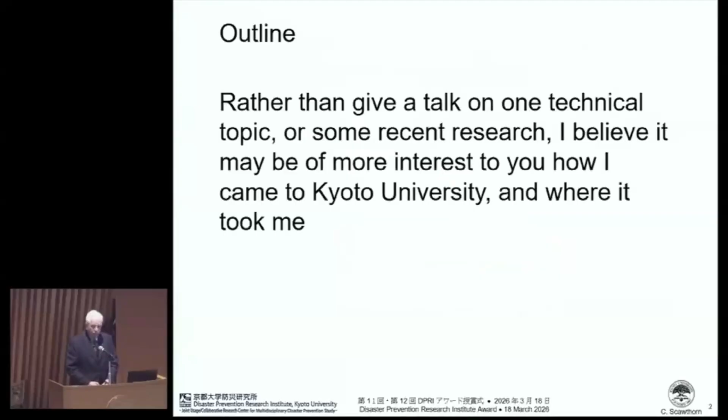The journey began in Brooklyn, New York, where I was born, under the shadow of the Brooklyn Bridge, which is approaching 150 years old and one of the great engineering structures, one of the first large suspension spans in the world.

I went to high school very close to that bridge at Brooklyn Technical High School, which is a special school for studying engineering, and I studied structural engineering there.

I then received a Bachelor of Engineering degree from the Cooper Union in Manhattan, a small school most people don't know about, but which is highly esteemed in some circles.

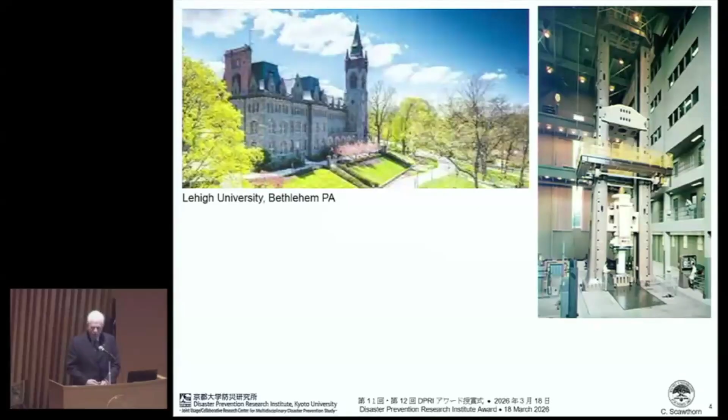And I then received a Master of Science from Lehigh University in Pennsylvania, which prided itself on having the world's largest testing machine at that time, a 5 million pound universal testing machine.

After receiving my master's degree there, I first worked for the electric utility in New York City, Con Edison, which is the equivalent of Tokyo Electric Power Company in Japan, designing electric transmission towers. I actually designed the towers for what was called the PJM, or Pennsylvania, Jersey, Maryland transmission line, which is actually the backbone for electric power in the Northeast United States.

I also worked on various issues having to do with Indian Point Nuclear Power Station, which was owned and operated by Con Edison.

Around that time, I also read a book that influenced me greatly, The Death and Life of Great American Cities, by a lady named Jane Jacobs. Jane Jacobs was not academically an urban planner. As a matter of fact, I'm not even sure she had an academic degree. But she observed life in New York City and what made the city vibrant, alive, healthy and successful, and what detracted from those wonderful, desirable assets. She came to write this book. It's a very powerful book. It influenced many people, and it made me interested in why cities are the way they are.

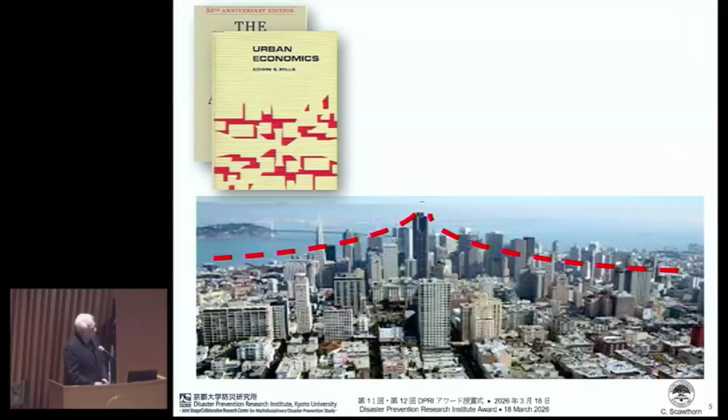So one day I was looking at the San Francisco skyline, thinking about that, and it occurred to me that the city of San Francisco, with its hills and its very soft soils near the water, and its concentration of the central business district with its high-rise buildings right on the softest soils in the city, was actually very poorly designed from an earthquake engineering point of view.

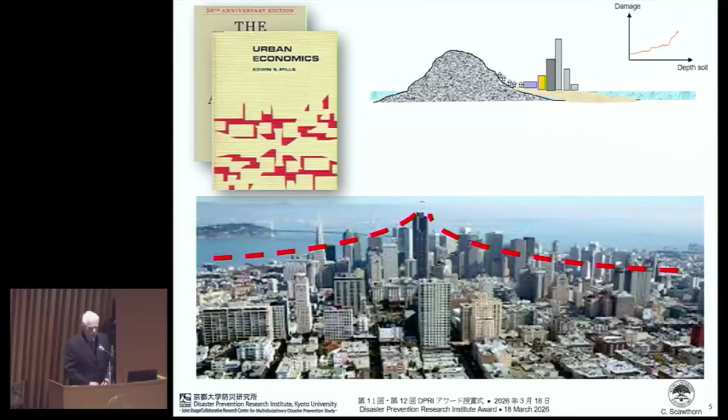As earthquake engineers, as structural engineers, we know that the deeper the soils, typically the stronger the shaking will be in an earthquake, and the greater the damage, everything else being equal. So why had we put the highest concentration of values in the city on the softest soils? In effect, the city was mal-optimized—instead of being optimized, it was exactly the reverse of how it should be when you took earthquake engineering and structural performance into account.

This was a very interesting question for me. I thought, what if we just moved the central business district, the CBD, away from the softest soils? Admittedly it already exists, but if we waved the magic wand and moved it, how far would we have to move it? What would be the delta to reduce the damage significantly? And would that be a valuable thing to do?

Obviously, if we moved the central business district hundreds of miles away, we would eliminate the earthquake risk entirely—we would not be near earthquake faults. But then the cost of transportation, the commuting costs, would be absurdly high, and that was not practical. So what is that delta? I thought, that is a very interesting question—I could do a doctorate on that subject.

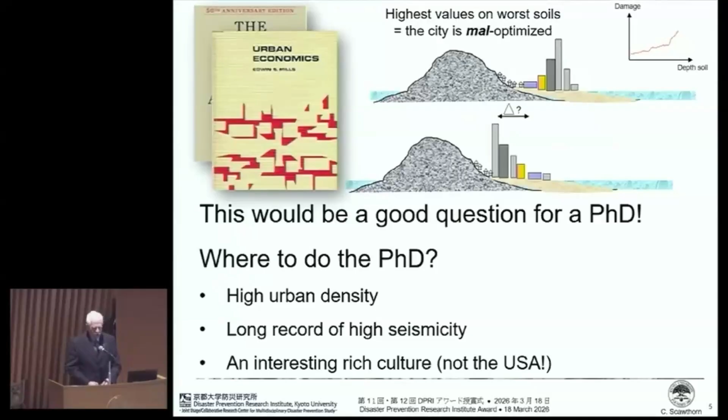But where would I do that PhD? Well, it should be a place with high urban density—that could be places in Europe, the United States, China, Japan, India. It should be a place with a long record of high seismicity, because I was going to look at the influence of earthquakes on urban form. And it should be a place with an interesting, rich culture, if I was going to spend 4 or 5 years studying. I thought, well, that would not be the United States—not because the US doesn't have a culture that's interesting and vibrant, but if I was returning for education, I wanted to learn a foreign language and experience a foreign culture. So when I put all these things together, only one place jumped out at me.

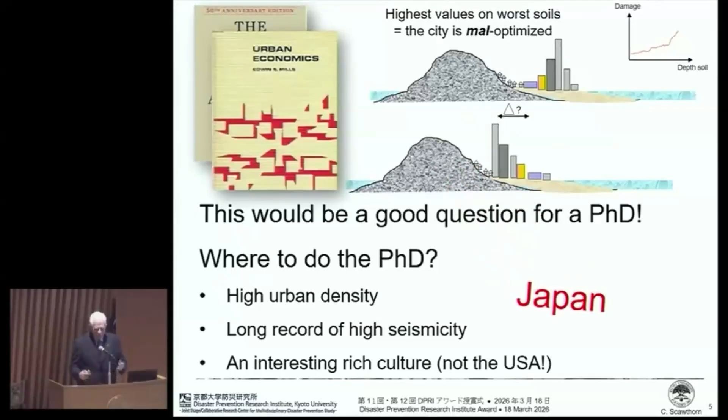And I spent 4 years in Yamada Ken pursuing this question, eventually in 1981 writing a dissertation on urban seismic risk, its mitigation and analysis. I was hoping also to have it be mitigation, analysis, and policy, but after 4 years I realized I was not perhaps a policy person, more a technical analyst. I attempted to provide an integrated study of the seismic risk of an urban region, analyzing the constituent elements and how we might reduce that risk.

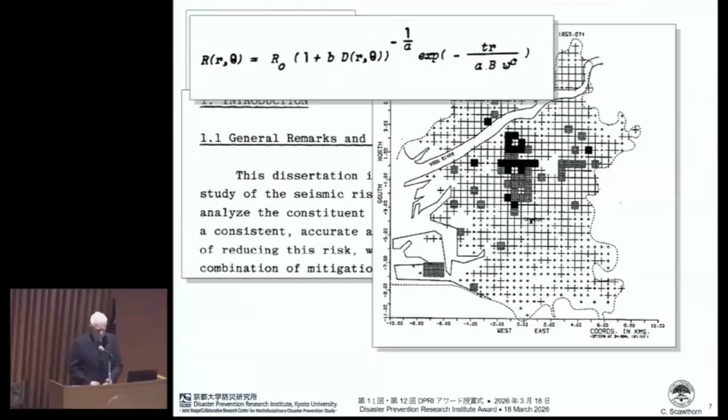I used Osaka as a case study, developed my own form of geographic information system before such things existed, and plotted the damage in this very crude manner at that time—the concentration of values, where they might be, and how it might move. And I took the equations from urban economics and introduced a new term, the damage term, which in effect is a damage function.

So this simple tent-like structure would be the urban form without taking earthquake risk into account. When you factor in earthquake risk, the central business district, the highest buildings, would move over to here, and the form would change in this manner given this damage function. Where we had high damage, the CBD moved away, and where we had little damage, the CBD tended to move towards that. I found that depending upon the subsurface conditions, you only had to shift the CBD a few hundred meters to have enormous savings in capital requirements, since you didn't have to build so strongly for earthquakes, and in the expected future damage—the present value of expected damage that would occur in an earthquake.

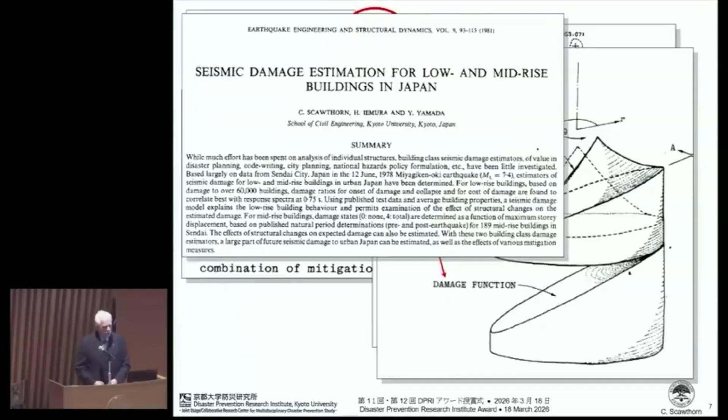I published a number of chapters from my dissertation in journals on the vulnerability of buildings in Japan due to shaking. I looked at 3 agents of damage: shaking, liquefaction, and fire following earthquake—3 of the major ones. I did not look at tsunami, but shaking, liquefaction, and fire following earthquake are certainly major agents of damage in Japan.

I published this theory in an economics journal, and I published the first probabilistic model on fire following earthquake for urban post-earthquake fire hazard. When I returned after receiving my doctorate from Kyoto University, I went back to San Francisco and, with National Science Foundation funding, did a similar study for the city of San Francisco, coming up again with similar results—you only had to move the CBD a few hundred meters to realize really enormous savings.

Now, we're not going to move the CBDs, but this could be a guide for future zoning so that over the decades, the central business district is shifted. Whether that will ever happen, I doubt it, frankly, but it was an interesting theoretical study, and it satisfied my curiosity.

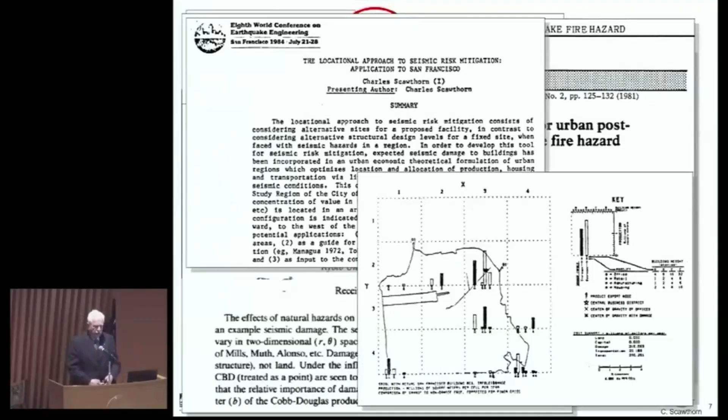But in the course of that, I learned many things. I learned how to model fire following earthquake and shaking. I learned, in general, probabilistic risk methods. And following that, my career has been dictated by that path.

I worked as a consulting engineer for about the next 20 years, then returned to Kyoto University, where I was a professor for 5 years, reaching the mandatory retirement age, then was a visiting professor at these institutions, and have engaged in consulting with one foot in academia doing research and one foot in consulting. It's a symbiotic process where the research feeds the practice of engineering, and the engineering practice feeds the questions to research.

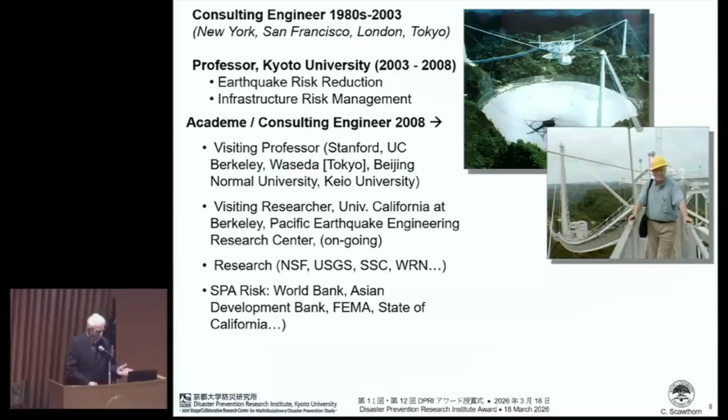Worked on many kinds of structures. This is the Arecibo Radio Observatory that no longer exists but was in Puerto Rico, and in James Bond movies. I did a seismic analysis of that as a structural engineer, and published a number of books and papers on these topics.

I also, at that time, was very interested in trying to reduce death and destruction. One of the greatest sources of death and destruction in the world are low-strength masonry buildings. They exist throughout, as Professor Alcantara Ayala has mentioned, in the Global South. These are unreinforced masonry buildings, taking various forms of adobe, bajareke, or other kinds of construction.

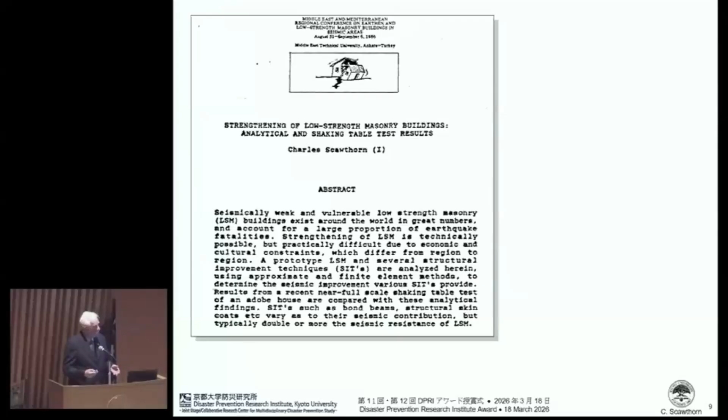Under National Science Foundation funding, I performed the first shaking table test of a full-size adobe building at University of California at Berkeley, and joined a committee and contributed to the development of the International Association of Earthquake Engineering's guidelines for improving the earthquake performance of non-engineered construction.

This is India, Iran, Latin America, much of Asia has construction of this type. These guidelines have been used and improved over the last several decades to reduce the destruction quite a bit. The other members of the committee were all very distinguished: Professor Arya from India, Teddy Boen from Indonesia, and so on. I was very fortunate to work with them.

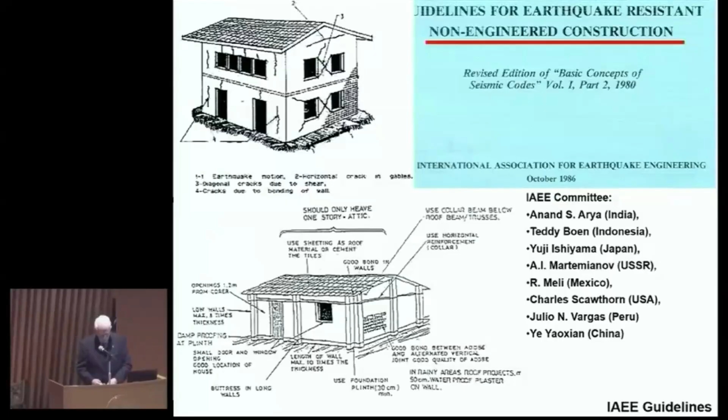But the fundamental thing that I had learned at Kyoto University was this method of probabilistic risk analysis. As we all know, by now this is common knowledge, risk is really the intersection of hazard, vulnerability, and the assets or values at risk.

When you take these things, you need some sort of a risk engine to integrate these factors to measure your risk. But each of these factors, such as hazard, is again the intersection of earth sciences, typically seismology, geology, and other fields. The vulnerability is, again, the intersection of materials science, structural engineering, and the dynamics of structures and so on. There are other fields I'm not mentioning here.

And the values, again, are the intersection of the economics and other values that are associated with assets. So we must combine all of these. Risk analysis is a multidisciplinary integration of all these factors.

But at that time, in the early 1980s, it was really not being very well applied. For example, insurance, which is basically the business of managing risk, in California in 1980 did not use probabilistic methods at all.

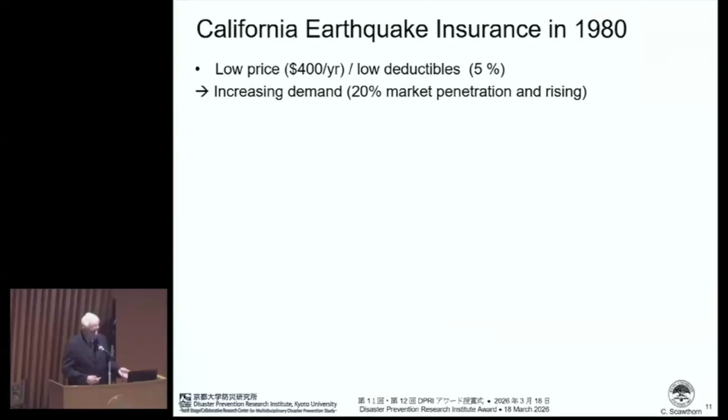Earthquake insurance in California was very cheap, very underpriced. The risk was actually much more expensive than what they were charging for it. More and more people, because of the 1971 San Fernando earthquake and other earthquakes, the demand was rising.

And a very interesting process had occurred, where back in the 1800s and in the 1920s and 30s, the insurance industry actually had much better knowledge of its risk than it did by the 1980s.

Back in the 1800s, they had mapped every building in cities. The Sanborn Company, for example, was one of the leaders in this field, mapping the risk. An underwriter, any insurance underwriter, could look up any building, see exactly how many stories it was, what the occupancy was, whether it contained any vulnerable fire materials or other hazardous materials, whether it was brick or wood or some other construction, where the exits were.

They could see all of this in a book that every underwriter's office had. But by the 1960s, this was regarded as old-fashioned, and all of this technology was eliminated. And underwriting was based simply on, if we haven't had a loss in the past, it must be a low risk, so we'll charge very little for it.

Of course, this omits the fact that some risks are infrequent, such as earthquake or other natural hazards. They only occur once every few decades or even centuries. So this statistical approach failed. But the insurance industry didn't realize this. In fact, they knew almost nothing about the homes and buildings they insured.

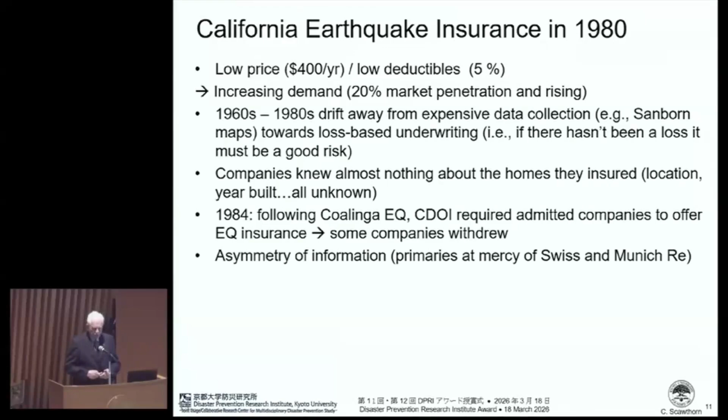Then in 1984, a small to moderate-sized earthquake in California called the Coalinga earthquake further skewed the insurance industry by requiring that all companies offer earthquake insurance in California. So some companies withdrew, and this created a crisis. And there was an asymmetry of information. The primary insurance companies were at the mercy of the reinsurers, such as particularly Swiss Re and Munich Re, who had started to use probabilistic risk analysis and would use the more accurate information that they had to get a better deal when they offered reinsurance to the primary insurance companies, the so-called asymmetry of information. All of this led to what became known as the birth of the modelers, the model companies.

They were born due to the convergence of the probabilistic risk methods, which came out of pioneering work here in Japan by Professor Kawasumi, and in the United States by Professor Alan Cornell, and in Mexico by Professor Luis Esteva and Emilio Rosenblueth. Also, the probabilistic risk methods had recently been started to apply to the nuclear power industry. So in a way, it was a trickle down from the nuclear power industry in some ways. It also occurred because by the early 1980s...

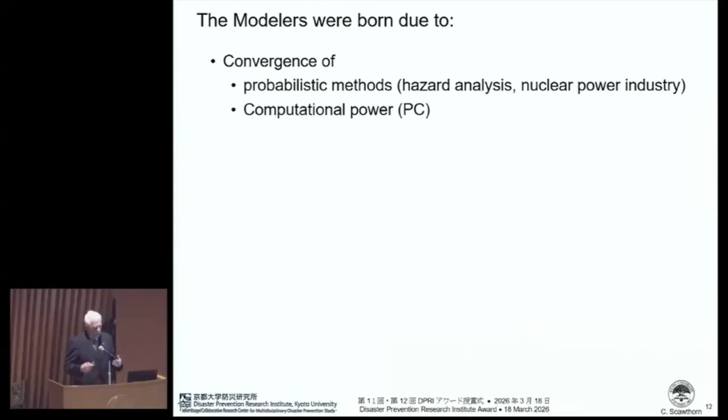The personal computer had emerged, and it provided computational power to these companies that they didn't have before. So these three companies were born, again, Karen Clark, EQE, which I was basically a founder of, and RMS, Risk Management Solutions. There was little interest from the insurance industry at first, but the interest increased after several cat losses.

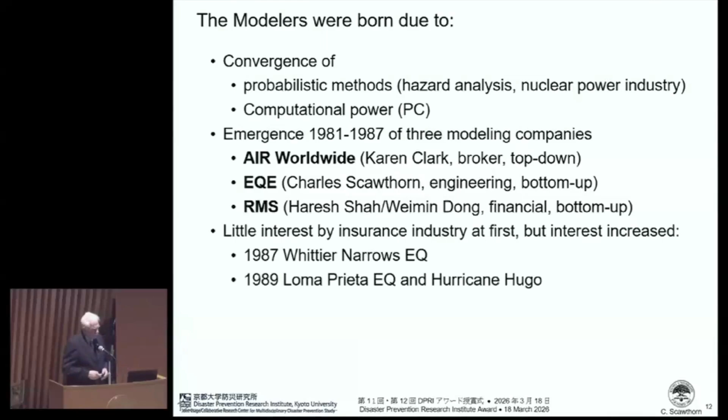The first couple, the Whittier Narrows earthquake and the Loma Prieta earthquake, really didn't capture their attention. But then in the United States, the 1992 Hurricane Andrew and the 1994 Northridge earthquake very much captured their attention, and they started to understand the benefits that probabilistic risk analysis would bring to their business.

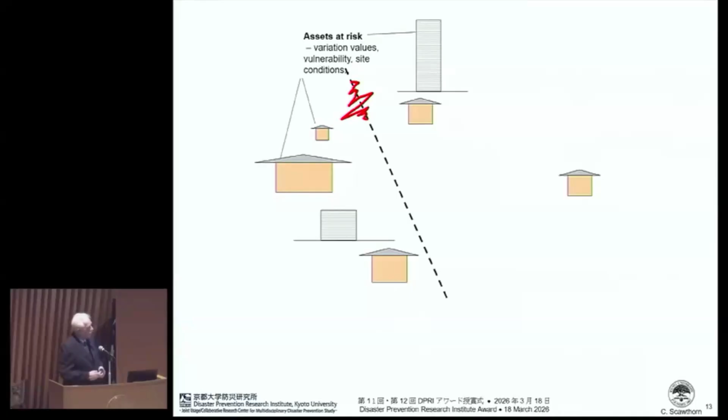Now, what is probabilistic risk analysis? Well, we start with a collection of assets, for example, these buildings. This is termed a portfolio. And threatening this portfolio is some source of hazard. It might be an earthquake fault, it might be a typhoon or a hurricane, or it might be a flood. Whichever one of these hazards occurs, its effects vary depending upon location. But that is the source, the fault, and so on.

And that source has a frequency severity curve. In earthquake engineering, it's called the Gutenberg-Richter magnitude frequency relationship, and it's typically a semi-logarithmic relationship. In other fields, it has other names. They're all basically a manifestation of a more general statistical law called Zipf's law, and they all basically follow the same pattern.

As I said, the actual intensity of the earthquake shaking, or the wind speeds, or the flood depth, will vary depending upon the distance of the asset, the topography, and other factors from the source. So this would be, in earthquake engineering, the ground motion model.

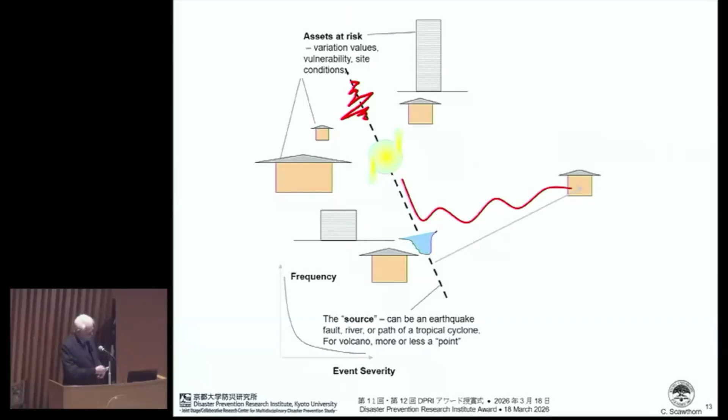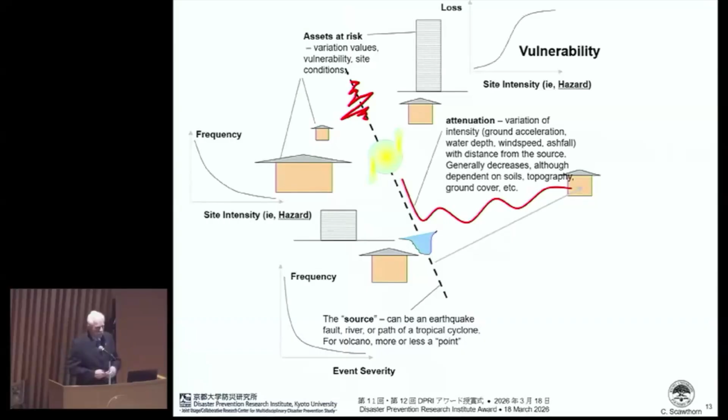So that attenuates with distance, and that has a relationship also. You can see here, the site intensity goes down, the hazard. Now, every structure, every asset has its vulnerability. That is the relationship between the hazard and the degree of damage that it will sustain.

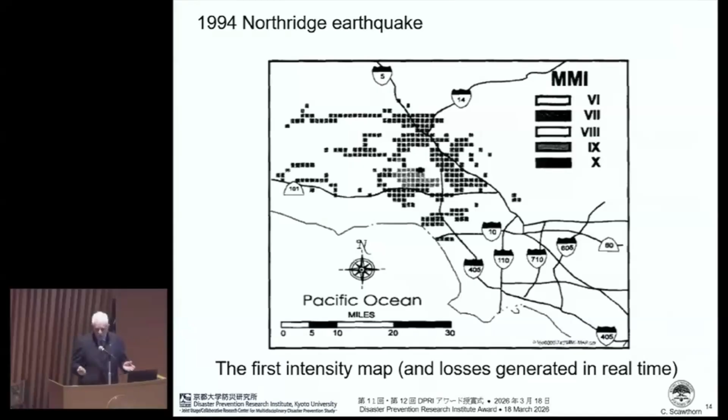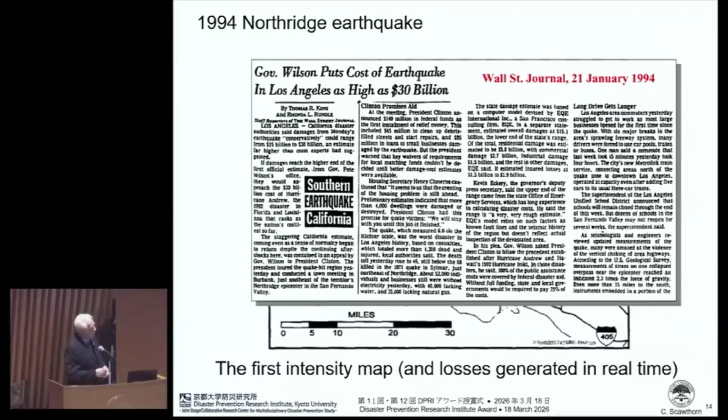It was the governor of California. First, we had a telephone conference call with the governor, explaining to him what we had done and how we estimated the losses to be on the order of $30 billion. And he thanked us very much, ended the call, picked up the phone and called the President of the United States, explained to him the data that they had used, and that was used to create the presidential declaration. It was the first presidential disaster declaration based on a computer model. And that was then used, and so on.

And we estimated not only the total damage, but the amount of insured losses that would accrue to the insurance industry. Now, in actuality, these losses were underestimates. They were made the same day of the event, and we underestimated the total loss. There are many reasons why we underestimated those, most of it having to do with poor data. But the insurance industry still did not know much about what they were insuring, and we were using the best data we had at the time.

But with this earthquake, they quickly understood the value of it. It also led to a broad increase in structural retrofits in Japan, and the Japanese insurers adopting probabilistic risk modeling. I often joke that I came for an academic meeting—I was here for a US-Japan meeting. I'd flown in the night before and the earthquake happened. I'd come for 5 days and wound up staying for 2 years because I opened the Tokyo office of our company at that time.

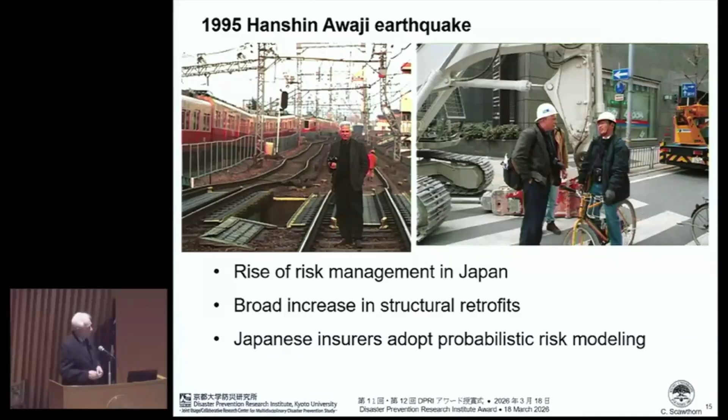It then became apparent that this technology should not only be applied to insurance companies, but should be more broadly applied for the benefit of everybody.

The Federal Emergency Management Agency in the United States conceived of a piece of software called HAZUS, which stood for Hazards US, a multi-hazards loss estimation methodology using these exact tools. Over the next 10 years, it was developed for earthquake, flood, and hurricane. As I made the point, the assets are the same no matter what the hazard is. The frequency-severity curves are different for different hazards, and the vulnerability curves are different, but the basic mathematical structure is exactly the same for all these hazards—in fact, for all hazards, they can all be modeled basically the same way.

So HAZUS was developed. I had the privilege of leading the development of the flood model for the United States in this methodology. HAZUS has gone on to be used for many years to model and manage earthquake, flood, and wind losses in the United States.

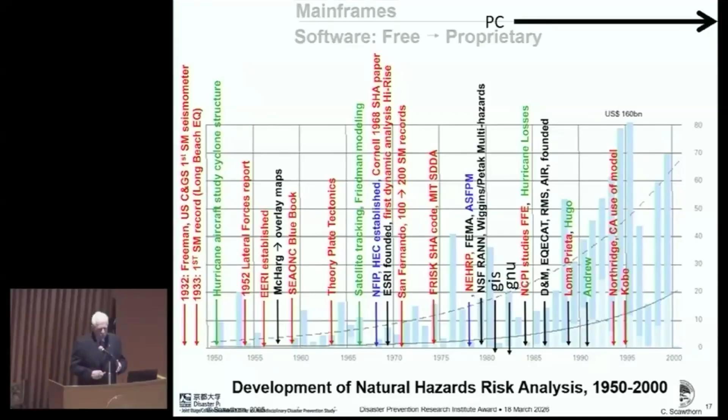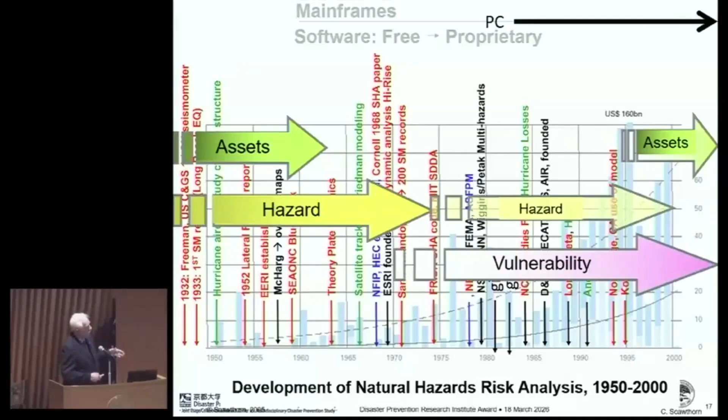Now, I know you can't read most of these, but these are different events. I've described some of them, such as the equations developed by the hazard analysis methodology developed by Cornell, Esteva, and others—those are some of what's shown here. Later, perhaps you might want to strain your neck and try to read the rest. These were all different contributions, primarily by academics, that increased our knowledge and led to better ability to understand assets—there was this gap where the insurance industry lost its knowledge of assets and then had to regain it. Hazard analysis improved, and vulnerability studies began around 1970 on how structures are affected by natural hazards. By convolving all of these, and with the rise of personal computing power, this led to risk analysis methods and the development of different modeling companies and HAZUS and other risk analysis software. So that's kind of the history of risk analysis.

And this led to—once these probabilistic risk models were fully integrated into the insurance industry—they started to innovate with these and create things such as cat bonds, and I'll explain what those are.

It became apparent that once we had these tools, you could take an area around Tokyo, for example, and divide it, and first do the calculations I've already described using those equations I presented, and estimate the probabilistic loss. But from a cat point of view, another way to look at it would be to draw a box around Tokyo and say, if a certain size earthquake happens inside that box—a very simple measure, do we have a magnitude 7 earthquake inside that box or not? You can calculate the losses then, given wherever that magnitude 7 might be.

And based on that, you can take into account deductibles and so on, and calculate a bond which could be sold to investors, which would be, in effect, a form of insurance by the people selling it.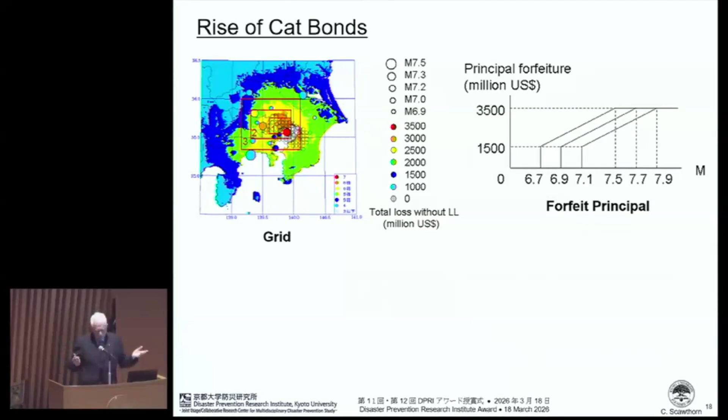So this was the emergence of what was called the cat bonds, or cat in a box, as they came to be known. These were parametric triggers—parametric meaning it was simply a magnitude within a certain parameter, a magnitude within a certain geographic area. And these came to have significant benefits for large assets in many countries, including Japan, when compared with traditional insurance. Now, why were they better than traditional insurance?

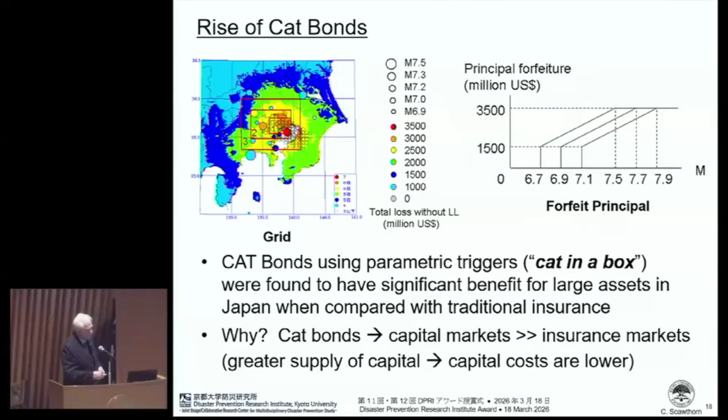Well, cat bonds could be sold—they're bonds. They can be sold on the capital markets, that means Wall Street, rather than in the insurance markets. And at that time, around 2000, the total amount of capital available in the world to all insurance companies was on the order of $400 billion. It's a lot of money. But the amount of capital available on Wall Street, in the Kabutocho in Tokyo, and in the London financial markets and so on was about 20 times that—actually more, $5 to $10 trillion in value. So that meant you could access a greater supply of capital, and therefore, since there's a greater supply, the costs are lower. This transformed the insurance industry.

And this led to what were called alternative risk transfer tools. One of them that I was involved in, for example, was a swap—what became known as a risk swap—between Tokyo Gas and İGDAŞ. İGDAŞ is the Istanbul Gas Company. And Istanbul, of course, has had earthquakes in the past and is actually still expecting, just like the Tokai Jishin here in Japan, they are expecting a large earthquake near Istanbul which will happen someday.

And of course, we are expecting large earthquakes in Tokyo. Istanbul in 1999 sustained 17,000 deaths in Turkey's Izmit earthquake. And of course, in Japan, 6,000 deaths in Kobe. So we know that we're still vulnerable to these things.

So the idea was to create a cat bond, but instead of selling it on the markets, just sell it to İGDAŞ, and vice versa, İGDAŞ sell it to Tokyo Gas. And they would swap their risks—in effect, they would pool their risks. So this was another kind of alternative risk transfer methodology that has now become very popular in the financial world.

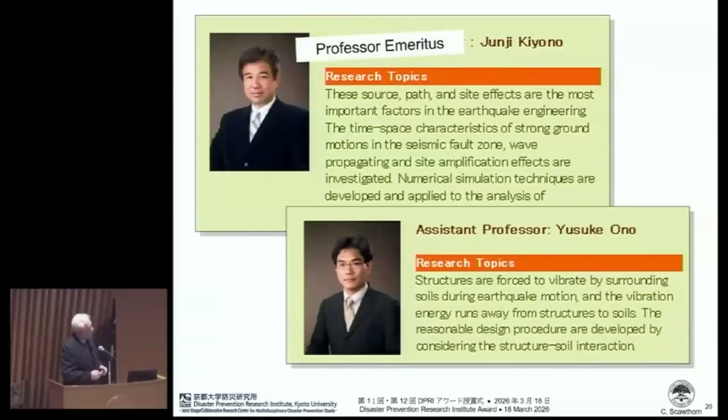So about this time, I came to Kyoto University, and Professor Kenzo Toki had retired. There was a search, and I was fortunate and honored to be selected to lead his former laboratory, working at that time with Associate Professor Junji Kiyono and Assistant Professor Yusuke Ono—though I should correct that now: Professor Kiyono has retired, the laboratory is now headed by Professor Aiko Furukawa, and Ono Sensei is now Professor and Vice Dean at Tottori University. I was honored to work with them.

Most lifelines have the same mathematical or topological arrangement: you have sources, such as a reservoir, transmission, terminal reservoirs of some sort, and then a distribution system. This is for water. So in effect, you have the heart, the arteries, and then the capillaries, if you analogize to the human body. And this is true for electric power, water, and many other types of lifelines.

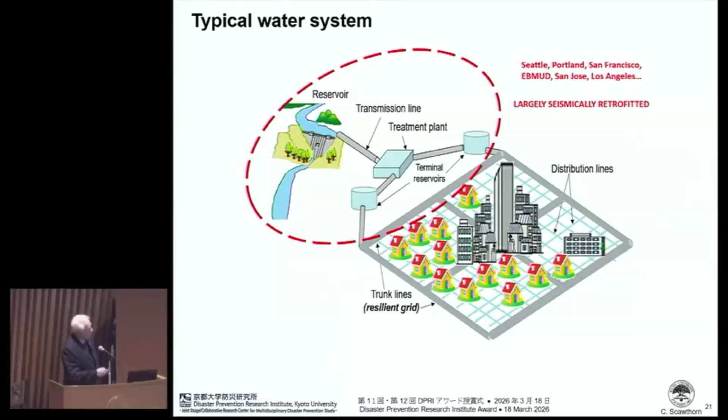Many earthquakes have shown that our urban lifelines are vulnerable to earthquakes and other natural hazards. Over time, many cities - using American cities as an example, Seattle, Portland, San Francisco, Los Angeles - had all reinforced their dams and their major transmission lines, so they could get water from the source to the last mile with some reliability. But they still had not tackled the problem of making their distribution system more earthquake resistant.

Why? Because it's a much more difficult job than fixing the transmission lines. The transmission lines in most cases are one or two, admittedly large pipes that run hundreds of miles or kilometers, but they are manageable in terms of rebuilding or strengthening them. In large cities, we're talking about thousands of kilometers of 10, 20, 30 centimeter diameter pipes, which cannot all be replaced at once. From a financial point of view, it cannot be replaced in any reasonable amount of time. It's just too expensive, too much. So the question emerges how to deal with this problem.

There's two fundamental approaches. One is to create selected lines and reinforce them, so you create what's called a resilient grid. This is being implemented in Los Angeles, for example. The other is to go through and use probabilistic risk methods to try to analyze which pipes are the most important pipes in the network.

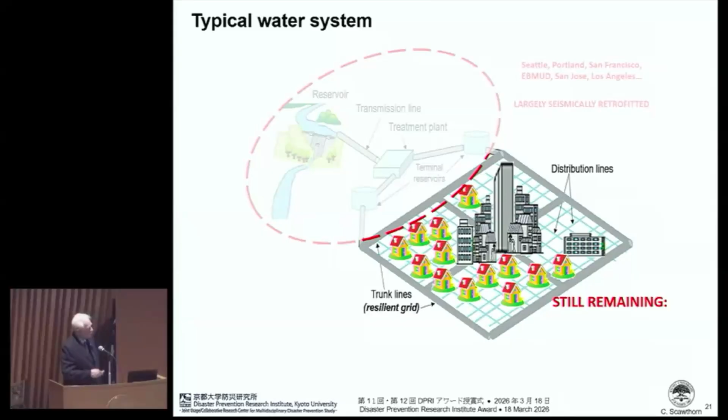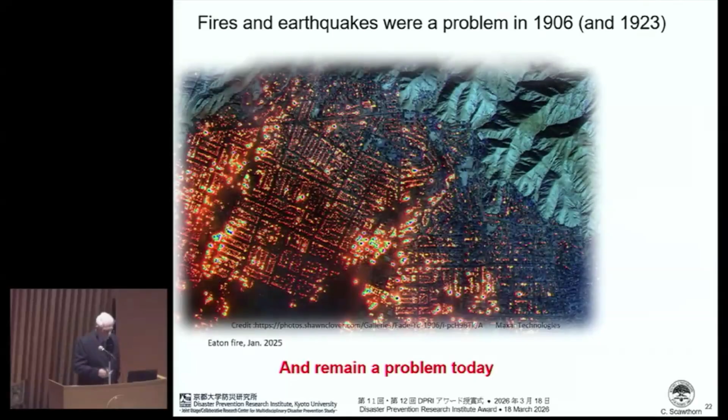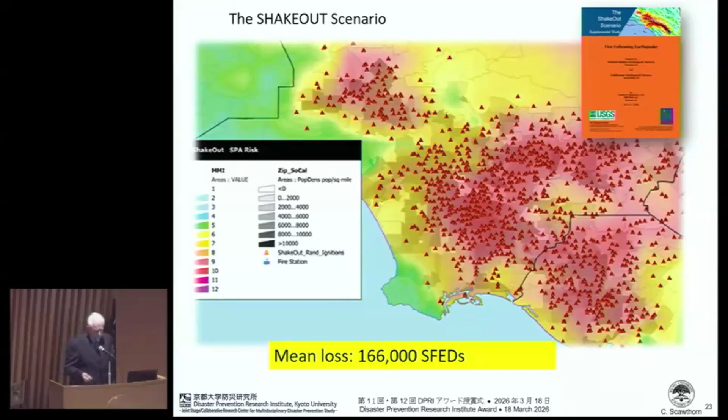Using the methods I described earlier, you can calculate the probabilistic distribution of losses that you may sustain. The mean estimate here is about 160,000 single-family equivalent dwellings or houses that would be lost. Now, of course, not all of these are houses, but we use that as the basic measure to communicate that.

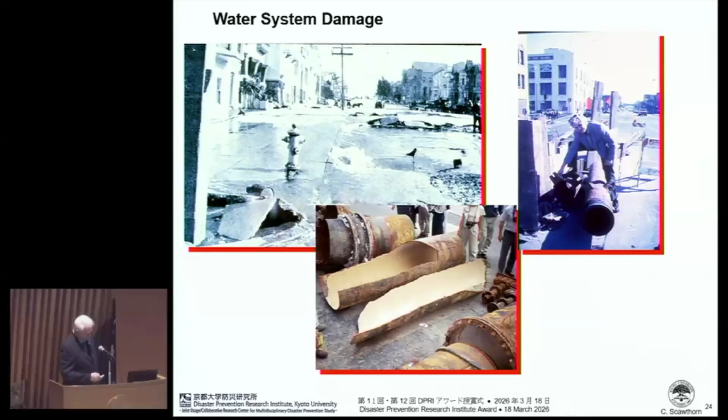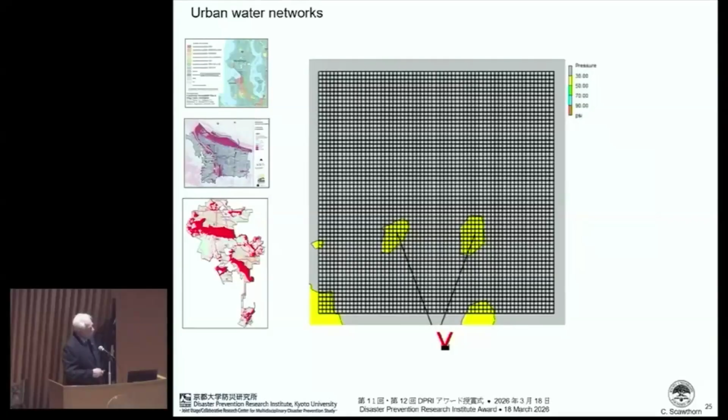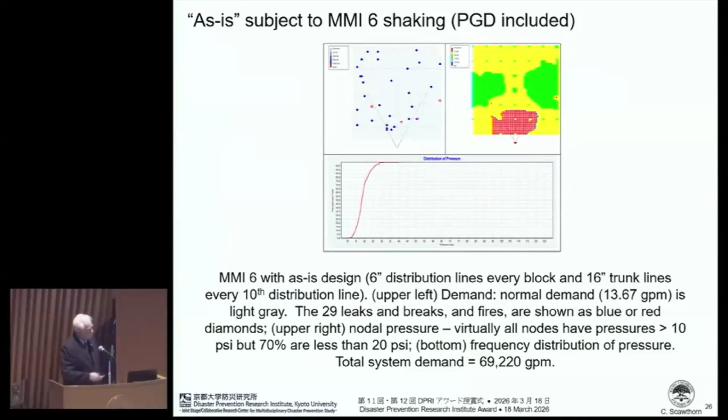This, by the way, is actually for San Francisco, threatened right here by the San Andreas Fault, which in 1906 ruptured with about a 7.8 magnitude, and is capable of magnitude 8, and is only 3 kilometers from the fault to this location here, 3 kilometers.

These are breaks in the distribution system. So again, whether we look at an idealized system or a real system, we're going to have so many breaks that the system is going to lose all of its water, which is what happened in 1906.

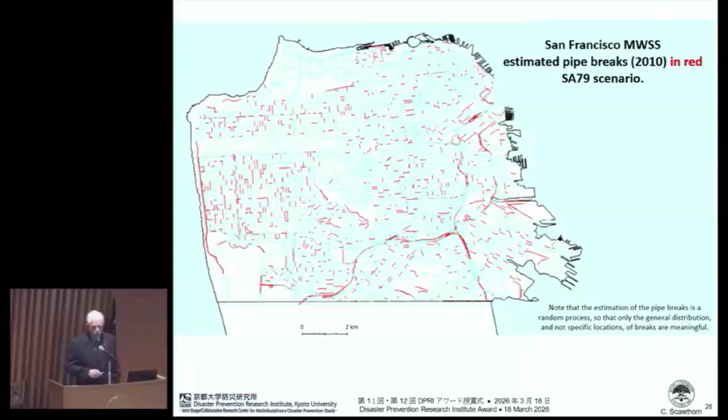It's ironic that San Francisco is surrounded on 3 sides by the Pacific Ocean, the largest body of water on Earth, and yet it burned down for lack of water because they couldn't move the water from here to where the fires were.

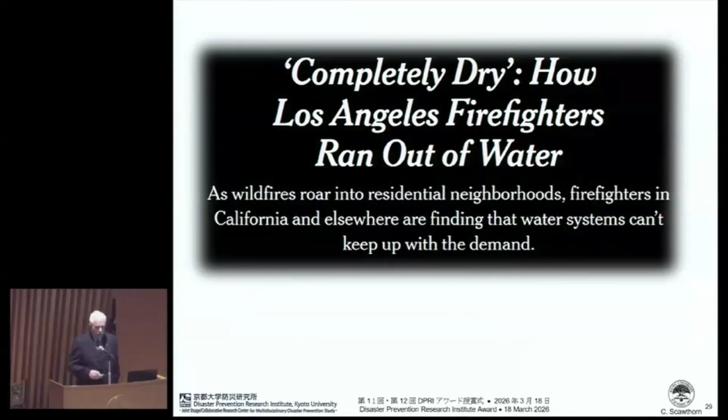This is an old story from 1906, but it's also the story from last year in the Eaton fire, in the Los Angeles fires. The hydrants ran completely dry. The system could not meet the firefighting water requirements of the firefighters. In a way, it's not feasible to do that, and the fire risk is huge.

This is San Francisco, and to quote a former fire chief, the city is built to burn, just like much of Japanese cities are too, with wooden buildings. It's all wood construction, and it's built to burn. So we are looking at a huge future conflagration here.

This was recognized back in 1906, as a matter of fact, in 1905 by the fire chief. He proposed in 1905 to build a special water system separate from the drinking water system, built to earthquake-resistant standards, to be used to fight fires. But it was rejected in November 1905 by the Board of Supervisors of the city, and six months later the earthquake happened and the city burned down.

So just like locking the barn after the horse leaves, in 1908 they built the high-pressure system that the fire chief had proposed. He had unfortunately died in the earthquake, but they built the system, and you can see it here.

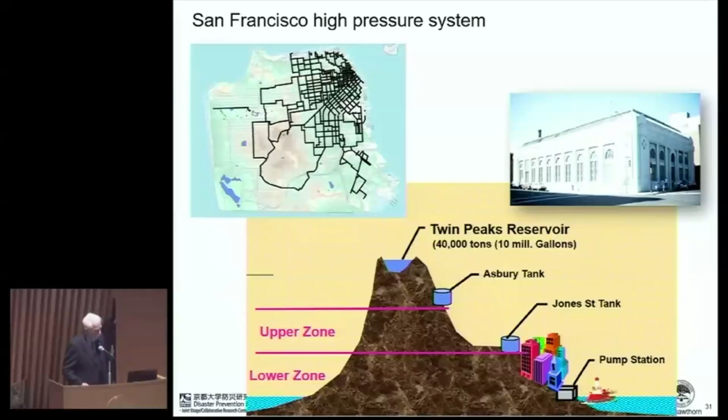This has been maintained and improved since 1908 and still functions today. It's called the high-pressure system.

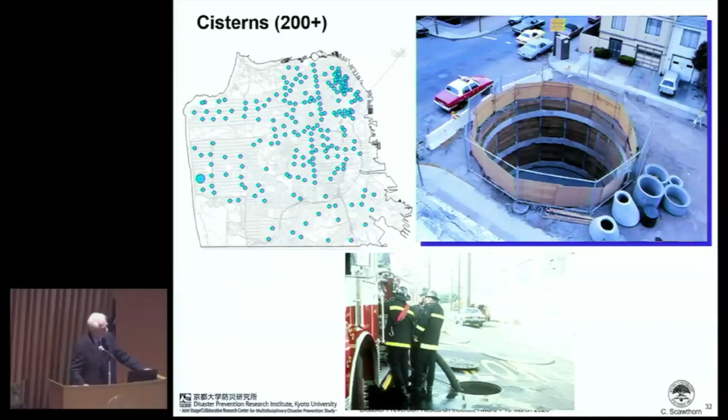Additionally, because the losses were so huge, they also built cisterns, or underground tanks. This is one under construction in the 1980s. There were over 200 cisterns around the city, underground water tanks in San Francisco. No other American city has anything like this. These are the firefighters — when they're finished constructing it, all you see is a manhole. You take the cover off, and the tank is below ground, and the fire engines can draft the water out of the cisterns. No other American city has anything like this.

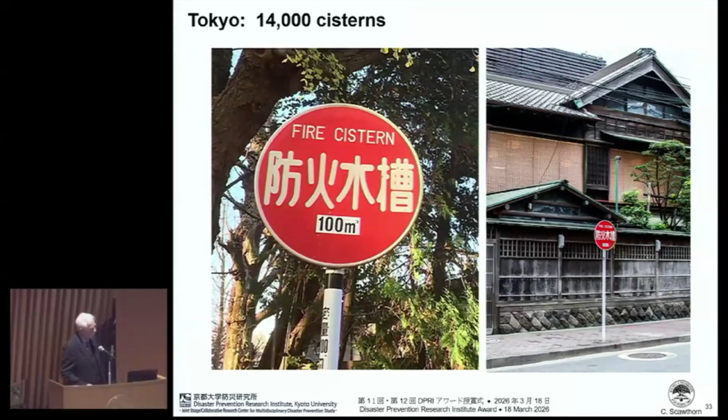Tokyo has 14,000 cisterns. The Japanese understand this problem very well, from 1923. But even Tokyo or Osaka do not have a high pressure system like that.

So as a result, San Francisco is now designing a new separate potable emergency firefighting water system called PEFWS, being built in this area here. I'm involved in the design of that. It is a dual purpose system.

Under ordinary conditions, it will be a series of trunk lines providing more water transmission capacity up to this part of the city. But in the event of an earthquake, seismically actuated valves will shut the system and isolate it from the drinking water system, and it will become a high pressure system just like the other one. High pressure, by the way, means we're talking 3 megapascals of pressure — it's quite high.

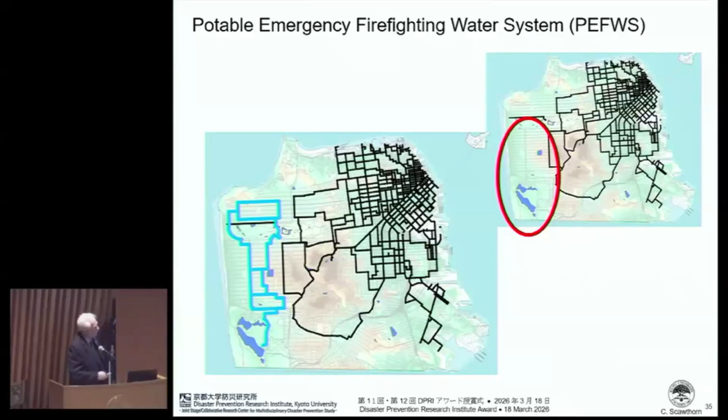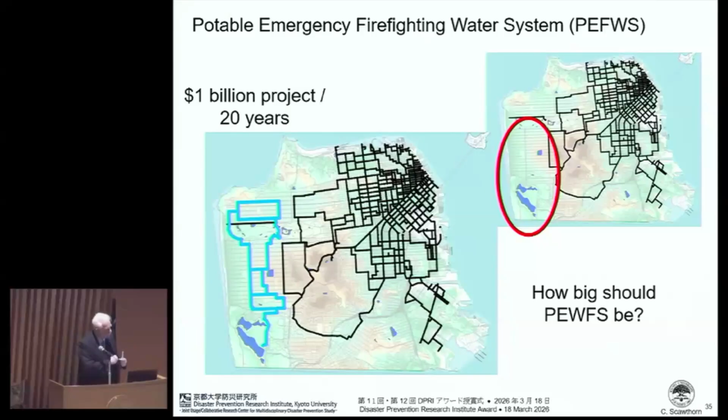Just building this is a $1 billion project that began 10 years ago and is going to take about 20 years in total to complete. But the question is, okay, that looks nice, but how big should it be? What do we design it for? How big should the PEFWS be, and what should be its capacity? Now I want to walk you through the process by which we're working on that.

The analysis methodology starts, of course, with the earthquake and the pattern of ground shaking that we expect. That pattern of ground shaking, combined with the building density and materials of construction, allows us to estimate where the ignitions will be in the city. And for each of these ignitions, we need to get water out of a fire hydrant, so this leads to a pattern of water demands on the system. These are probabilistic.

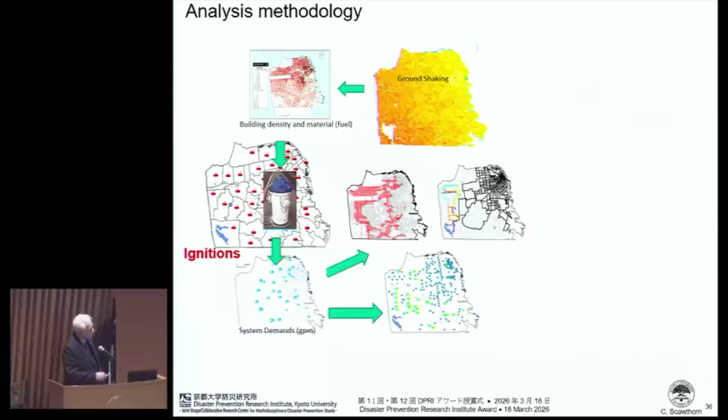Then we can supply that water from one of 3 sources: the potable drinking water system, but we know that's going to fail, as I showed you; the high pressure system, which is what we're designing; and the cisterns, which are a backup to this system. So really, we're designing this system to meet these demands.

However, these will all be affected by ground shaking and permanent ground deformations, which we know will create a certain amount of damage from various relationships, which will damage the system and degrade it.

So we'll still be able to provide some of these supplies, but not all of them. And we wind up with a system reliability curve here, which then feeds back because some of these fires will not have water and they will grow larger, which again then increases the demand, goes back through this curve. We need more water. We come back here, the fire is larger. We go back, we need more water, and so on. So it's kind of a vicious cycle.

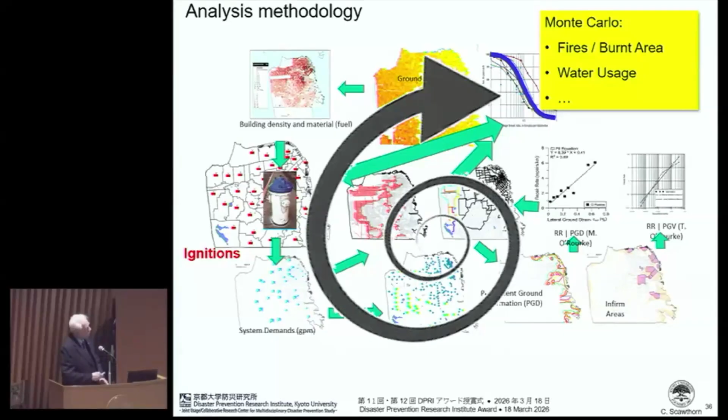To model this, we use Monte Carlo methodology, in which we run this process thousands of times to calculate the distribution of ignitions and water demands that we need to design for. The result is a probabilistic distribution of the fires in the burnt area and the water required.

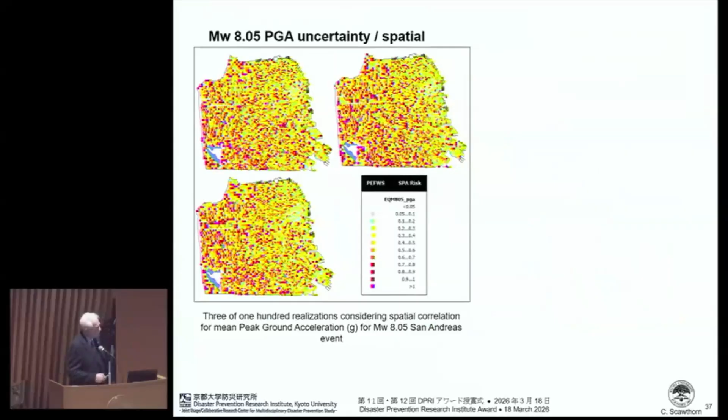I should mention, by the way, the ground motions are not simple. They're spatially correlated, and we take into account spatial correlations in the ground motions. Why? Because it's a double whammy, where the spatial correlation means that under a particular situation, the high intensity ground motions will cluster in a certain part of the city. And that cluster not only creates more fires, but it degrades the fire system above average. It degrades the water system above average, which means you have less water than you would think on average. And those two together, you have the above average number of ignitions, and the loss of the water pressure, so you get a double whammy leading to a conflagration. So we take that into account. It's vital to consider spatial correlation.

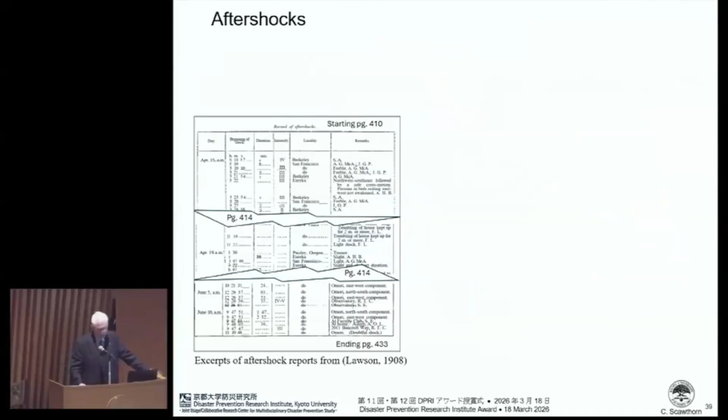Not only do we look at the main shock, but we look at the aftershocks. The aftershocks are governed by two basic laws, Båth's law and Omori's law. I think some of you are familiar with these. Without going into a lot of detail, we take that into account because there will be at least one or two aftershocks on the day of the earthquake.

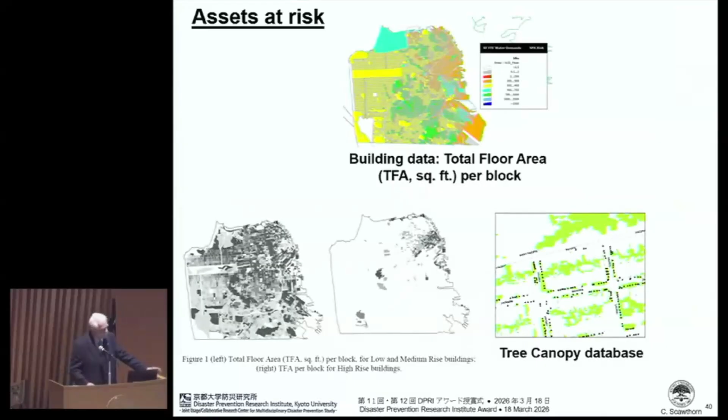To calculate the ignitions, we look at the assets at risk, the building data. This is the density of low-rise buildings, the density of high-rise buildings. There are many trees in San Francisco, so that's another form of fuel. We know we have wildland fires. We're going to have tree-fed fires in San Francisco, so we take that into account.

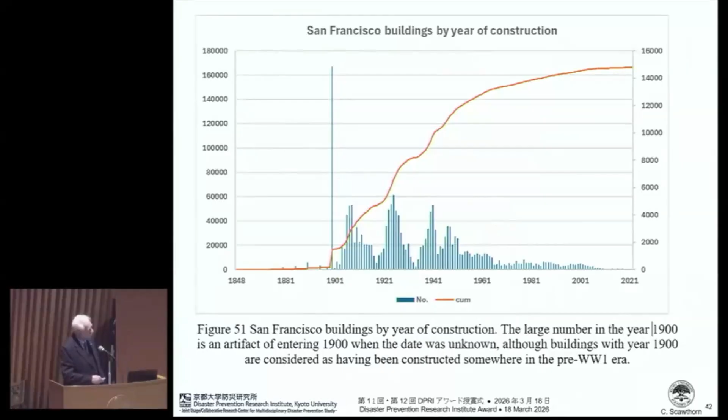And we look at the age of construction of the different buildings. You can see here the city went through several periods of high construction and then low construction, such as World War I, the Depression, and so on. By this point, the city had already been built out, so there's very little new construction.

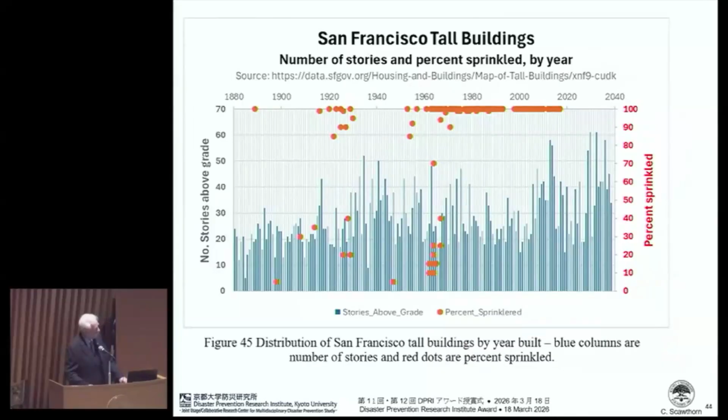We surveyed all the buildings, and because there's different kinds of fire vulnerability, or different kinds of construction in California, we take those into account, whether it's platform, so-called platform or balloon type of construction. And we look at which buildings are sprinklered. We have data on all the buildings that have sprinklers, and many of those sprinklers depend upon the low pressure system for pressure, and they will fail. But some of them, especially in high-rise buildings, have a backup water system, a tank, and we take that into account. We take into account the spacing between every building.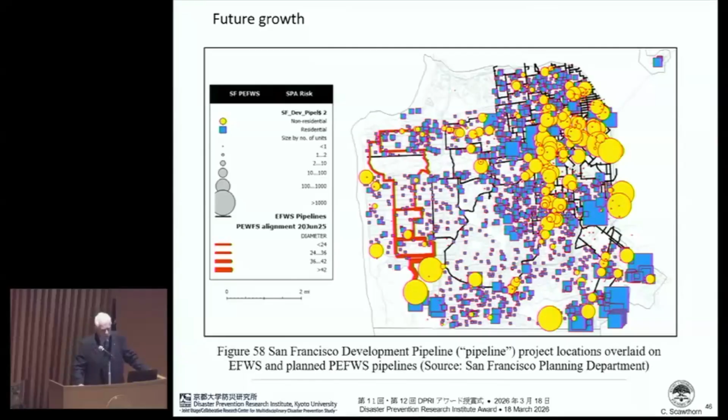And the future growth. We're not building for today. We're building the system to meet the city as it continues to grow. We estimate the city will grow by 50% by the year 2050. It has a population now about 800,000, and we expect it will be 1.2 million people in 30 years. And so we take that growth into account.

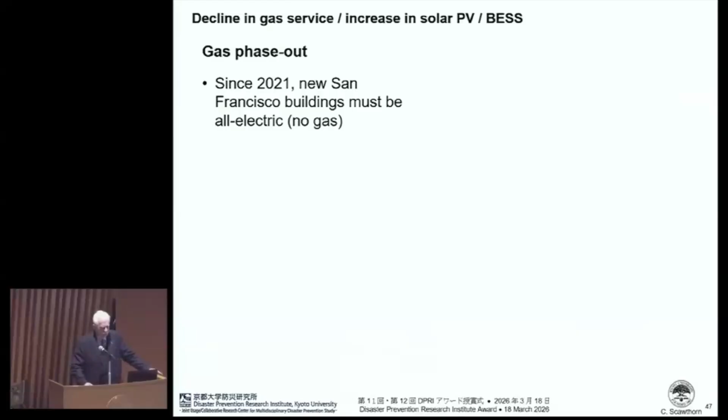We also look at what's going to change over the future. San Francisco is phasing out gas as part of trying to be greener and improve the situation with regard to climate change. Gas is used in California for cooking, just like in Japan, for cooking, for heating homes, and for heating hot water. But since 2021, San Francisco has mandated that all new buildings must be all electric. They're phasing gas out, and this is happening across the state. But when you phase out gas as a source of energy, you must replace it with another source of energy.

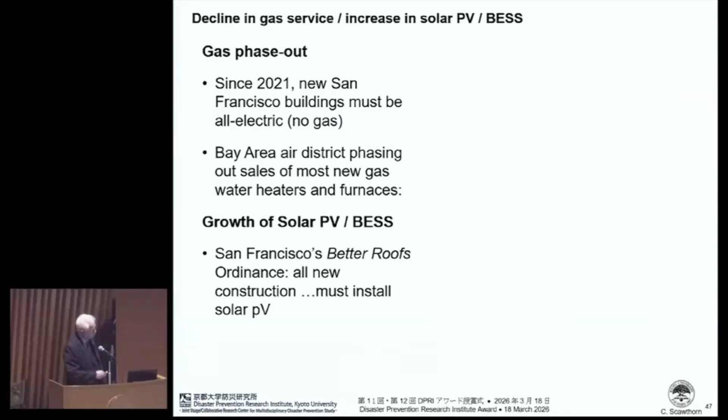San Francisco is now mandating that all new buildings must install solar panels. So this is another source of fire. We're getting rid of the gas, which reduces our fire risk, but we're introducing solar panels and battery energy storage systems, and they are a new source of fire. What the trade-off is here, whether the fires are going to be less or more because of this, we tried to analyze, we don't really know, but that's another question.

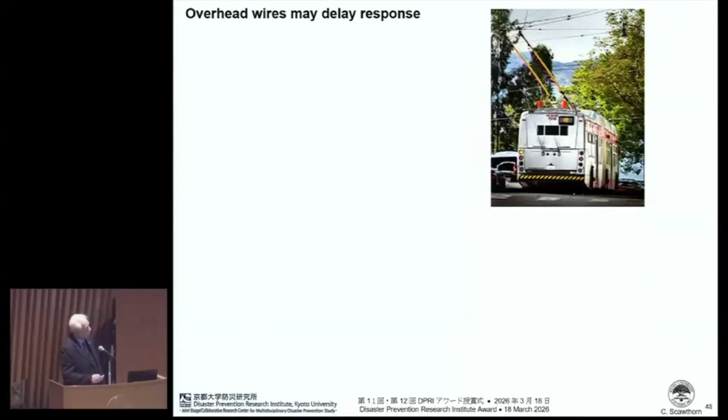Lastly, San Francisco has a system you don't have in Japan called trolley buses, which are electrically driven buses driven off of overhead wires. This wire network in some places can be very dense, and we expect in an earthquake that some of those are going to fail and come down and prevent passage of fire engines to get to the fires. So we've mapped all that out and take that into account.

So doing all this, conflating all these different factors, we come up with an average or mean probability of ignition across the city. And this is the start for us designing that water system. We have to do all of this in order to determine the demand, and the water system has to have the capacity to meet this demand.

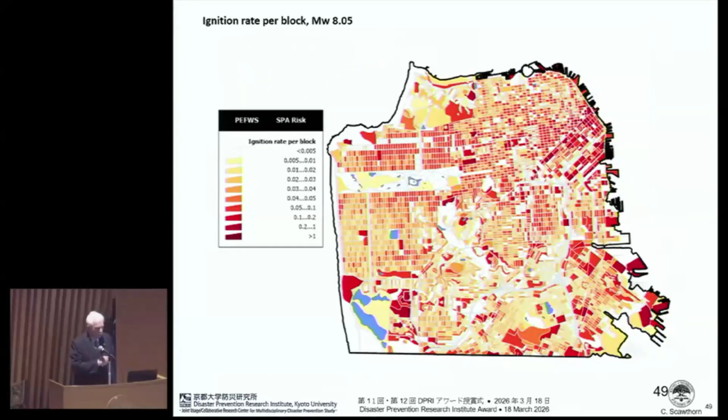So this is the demand. The average number of ignitions is shown here for this magnitude 8 earthquake. And on average, the 50th percentile is 174 ignitions in the city in the first 24 hours after the earthquake. To put that in perspective, on most days San Francisco will have 1 or 2 fires. On a bad day, it'll have 4 or 5. We're talking about 170 fires here.

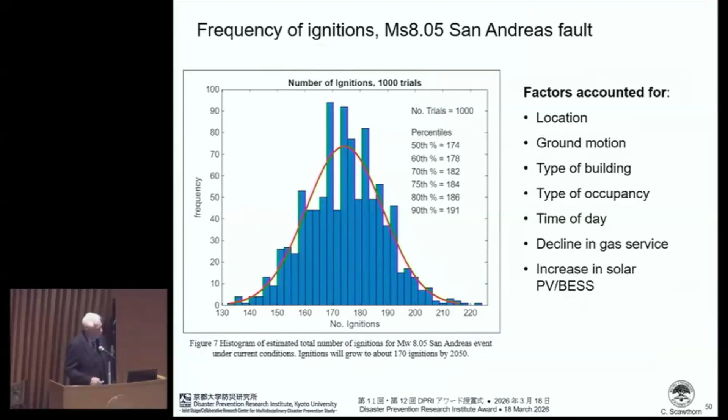Clearly, we've got a problem. That's why the city is spending billions of dollars on this. A key vulnerability, by the way, is the hydrant system.

The hydrants, where the fire department can connect to the water system to get firefighting water, are different in the United States than they are in Japan. In Japan, you have below ground hydrants. It's just a yellow box on the street. The firefighters open that up and connect to it to get their water.

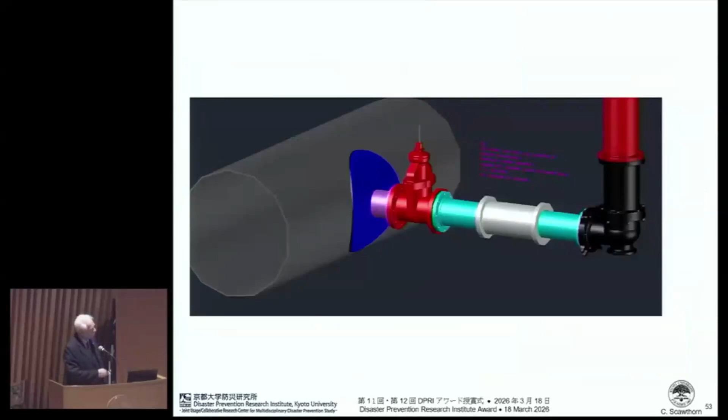This is, again, the finite element model of the whole system here that we're doing.

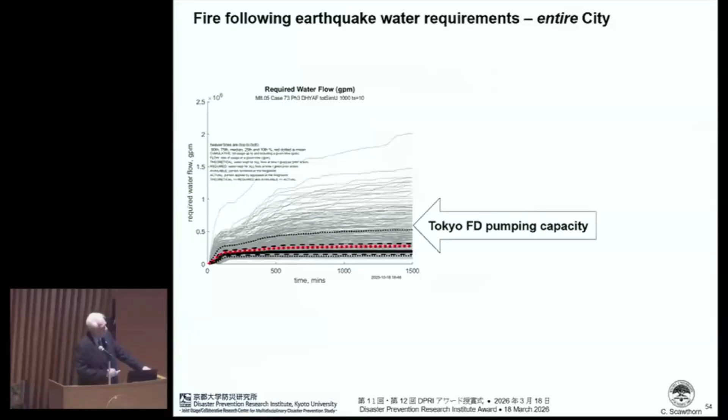So you can see here, the heavy black line is the median demand. And this, by the way, to put this in perspective, this level here is the total Tokyo Fire Department's entire pumping capacity. If every fire engine in the Tokyo Fire Department, which is 20 times the size of San Francisco, were pumping, this is how much water they would use. And this shows at the 25th hour, the distribution of flow per minute that would be required, compared to Tokyo Fire Department's capacity.

So using these curves, we can calculate the size of pipe and the size of pump stations that are going to be required throughout the system. And on this basis, the city will be spending $1 billion.

However, given this, you need to decide what's my design point. Right now the city's design point eventually becomes how much money do I have and what does it buy me. So the design point in this case, we're using a working hypothesis of having 75% reliability. In other words, meeting 75%, or 3 out of 4, fire demands under all possible cases. And we estimate that that probably is good enough.

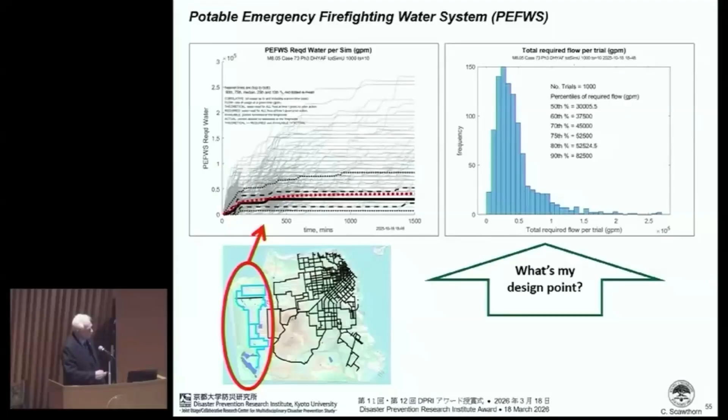And that's going to cost about $1 billion. If we wanted to provide higher reliability, for example 90%, we're talking about $5 or $10 billion, which the city can't afford to spend. Even $1 billion is a lot of money. So this final design point will be decided—it hasn't been decided yet, but right now the working hypothesis is 75% reliability. So I could go on, but I will stop at this point.

I just have a couple more points to make. These are some of the disasters I've surveyed over the years: earthquakes and hurricanes, typhoons and floods and other things. I could talk about those for quite a bit, but I won't.

But I do want to talk about, lastly, GADRI. Professor Alcantara Ayala gave a very nice talk about GADRI, and mine's not quite as detailed, but I do want to discuss it for a moment. When I was retiring from Kyoto University, I had a discussion. I thought to myself, disaster research institutes exist around the world. I can name dozens of them, and there are many more I can't even name. And yet they don't talk to each other very much.

And I started thinking about that, and I thought to myself, the oldest, arguably the oldest, and certainly the largest disaster research institute in the world is here in Uji. And it would be completely natural for Bosai-ken, DPRI, to provide leadership to all the other disaster research institutes in the world through some sort of global alliance. I had the discussion with Professor Tatano, and he thought that was a good idea, and mostly, almost entirely, he took that idea, and over the last 18 years has, as Professor Alcantara Ayala described, grown GADRI with the help of a few other people.

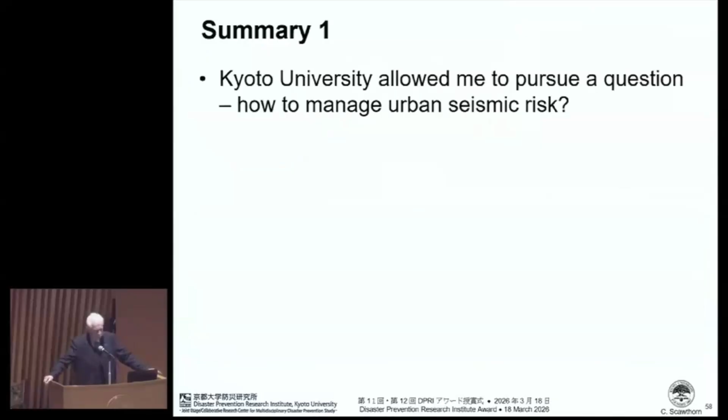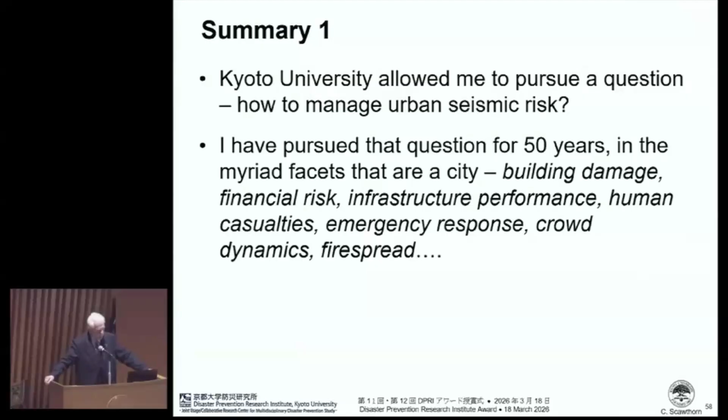So in summary, Kyoto University allowed me to pursue a question: how to manage urban seismic risk. I have pursued that question for 50 years in the myriad facets that are a city. A city has all these different dimensions: building damage, financial risk, infrastructural performance, human casualties. I haven't spoken about crowd dynamics and so on, fire spread and so on. Time has allowed me to only go into a few of those facets today.

I am deeply honored to receive the DPRI award, especially when I join the other DPRI fellows, starting with Professor Kanamori, a giant in seismology, and going through all the other recipients, including Professor Collins, most recently, number 11, Professor Alcantara Ayala, Professor Bard, Jim Goltz, and others. I'm deeply honored to be included in that company.

Because of Kyoto University and DPRI and many other people in Japan, I've been able to do some of the things I described, and perhaps those have been a small contribution in some way to natural hazards risk reduction. And certainly that was my goal. I dedicated my career to that. I've learned much in Japan, not only science and technology, but also courtesy, generosity, harmony with nature, and many other things, some of which are ineffable, that cannot be described, but all of which I have gained from, and which I am deeply appreciative to Japan and all of its people for.

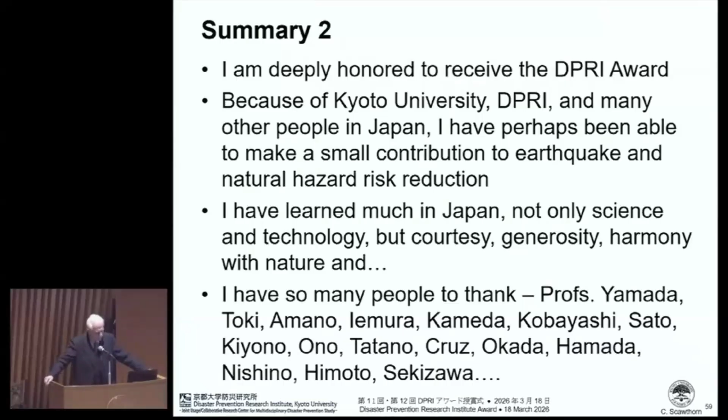I have so many people to thank, beginning perhaps with Professor Yamada, Toki, Amano, Iemura. Many of these names are known to you: Kameda, Kobayashi, Sato Sensei, Kiyono, Ono, Tatano, and so on. Particularly Professor Yamada and Professor Iemura. Iemura was the assistant professor when I joined Yamada Ken. He later became the professor there. And Iemura-san is still with us, but he's not able to be with us today.